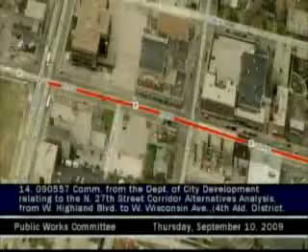Good morning, Commissioner. Good morning, Mr. Chair. We'd like to share with the committee this morning the results of an analysis done by the department in conjunction with Avenues West, some of the West Side businesses, as well as the Sohi District, and of course with the full concurrence of Alderman Bauman—in fact, at his request. We're very pleased to have representatives this morning from PDI Graef, who conducted the analysis.

They're going to go through the findings. One of the reasons we did this is because there's an opportunity to take state funding allocated for North 27th Street repaving, as well as streetscaping money made available through another grant process, along with the ongoing commitment from folks we've been working with in the Business Improvement District, the Sohi District, and the neighborhood, to really make a substantial change on North 27th Street.

Alderman Bauman challenged us to not just look at it as a repaving project, but to look at it with a blue sky approach—what could we do if we really put our minds to it, how could we provide some type of transformative reconstruction of the street. With that as our guide, we instructed our consulting team to do exactly that. I think it's a very exciting concept, and I think you'll all admit it has real appeal.

If this were to be implemented, it would result in the city having to acquire some property. I want to be very clear, particularly to the property owners, this is not a property acquisition strategy that we're putting forward this morning. This is simply a communications file, blue sky thinking, what could be done. It does not commit the city to a position to acquire any property at all, but rather to start a process with the street—which has been ongoing—to figure out whether or not this makes sense to move forward.

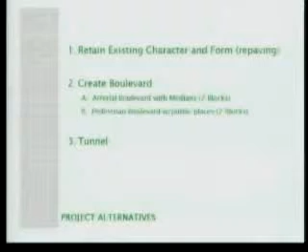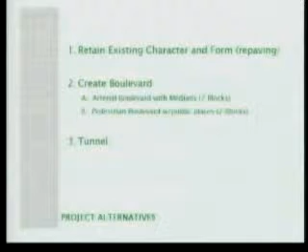It's very limited. This slide lists three specific options we were asked to analyze, looking at the potential cost—very ballpark—and the land use impacts of these three directions, investigating each alternative. In some cases we used existing material; in some cases we drew up new ideas. The first alternative is leaving everything the way it is in terms of development and buildings, but retaining the existing character—essentially repave and add streetscape.

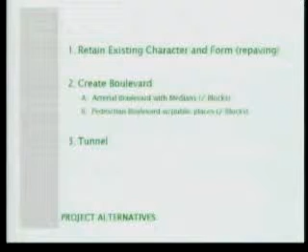The second alternative, listed on screen as 2A, is to create an arterial boulevard with a median. The third alternative we were asked to look at was a tunnel. Now, I should back up one picture—this is the project area, and we actually extended the project area a little bit beyond what our contract defined.

The project area went from Highland down to Wisconsin. We thought, after a lot of discussion with the community groups and staff, that it made sense to think about going a little bit further south down towards St. Paul, although that southern edge is a little vague as to exactly where the analysis should stop.

So we were to look at these three alternatives and estimate the land use impacts and the cost estimates for each of these three. Alternative 2B is something that came up during the course of the process, and we were not asked to provide a cost estimate for that. This is, again, a very tight budget.

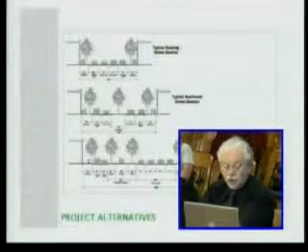I'm going to describe each of these three alternatives. Basically, there's the existing street section, a typical boulevard, and what we just named for convenience in the context of this document, a grand boulevard street section. I'll talk about all three of those.

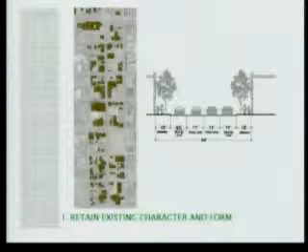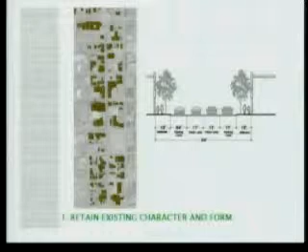Comments about the existing street are that the sidewalk widths are a little bit tight for any kind of outdoor sidewalk cafes or general pedestrian movement. Secondly, on 27th Street, if this is going to take the amount of traffic that DOT wants it to take, the parking lanes would probably have to be driving lanes during rush hours. There may be some way to balance that between on-street parking in non-rush hour periods.

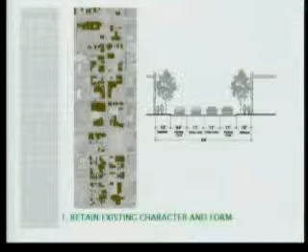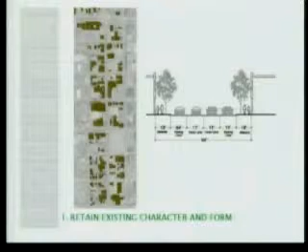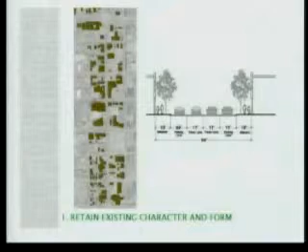And the cost estimate for this, which was basically given to us - the city has some good numbers on this - the repaving was around $2.1 million, of which $1.8 million was state and $300,000 was local. Then the streetscape, which I believe was also state funded, is another $1 million. So this is kind of the base alternative. We didn't do any original analysis for this - there was no need to redo it. We're looking for ballpark numbers.

The second option was essentially to create a median from Wisconsin up to Highland. We looked at a variety of sub-options, like the possibility of a roundabout where it crosses Juneau. Maybe that makes sense, maybe it doesn't.

But the big issue with this median is that it would then require an 84-foot width right-of-way, which would involve expanding the road and taking down buildings on one side or the other, or maybe some combination of both. Again, we were looking here at big picture issues.

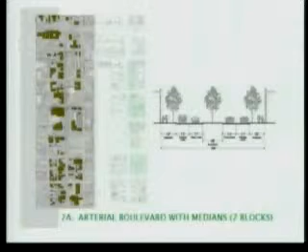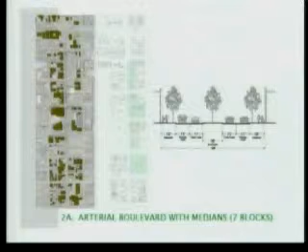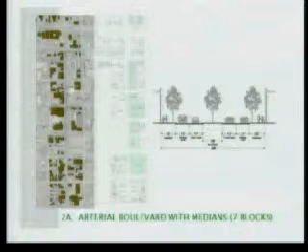We did a rough sum total of the assessed value - 125% of assessed value on each side of the street. On the west side, which I don't think we had before, Alderman Bauman, when we spoke, it was about $7.4 million of assessed value. On the east side, it's about $6.7 million, and that's just from Juneau to Wisconsin. I don't think we went down to St. Paul for that - check. We did go all the way down. Oh, okay, it includes down to St. Paul.

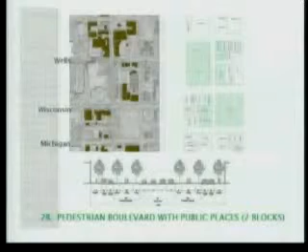The third option we looked at - and I want to say that in conversations with a lot of the property owners and other businesses in the community, there seems to be, I would say, a general leaning towards some version of this option as a preferred direction, notwithstanding all the items that Commissioner Marcoux mentioned. In this option, I'm going to back up a few slides here just to describe it.

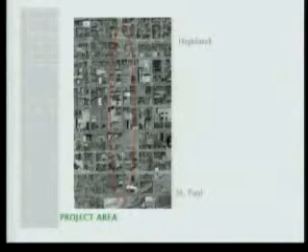In this option, essentially from Highland down to Wells, or I think it's from State down to Wells, the street stays the way it is, and the streetscape is used. But between Wells and going south, possibly to St. Paul, the street is redesigned into what we are referring to as some sort of a grand boulevard.

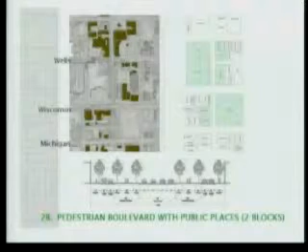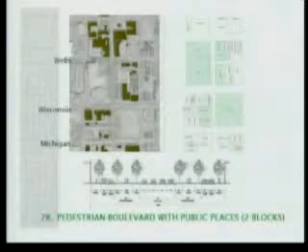By that, we mean the traffic runs down the center of the street, as you see right here in this cross-section. There are two side service aisles - they're not really frontage roads. I'm going to skip forward and then come back.

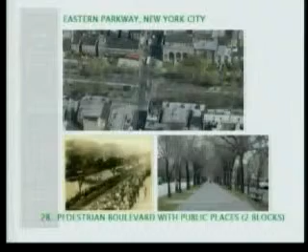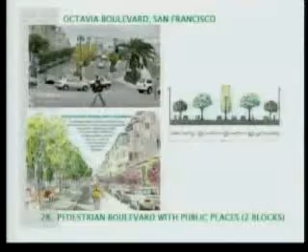These side aisles are modeled after historic boulevards. This is one in New York City that Olmsted did called Eastern Parkway, and this is one that was just recently done in San Francisco, and you can see the two side aisles here and here. And what those side drive lanes do - and actually the city of Milwaukee has some of these, except it doesn't have the landscape that makes them really attractive places.

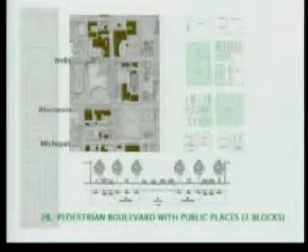The idea in this model is to essentially use these side lanes as a place for pedestrian movement and surface parking. However, the right-of-way is 164 feet when you do this. There are examples of this, and this is fairly typical. The reason for locating it on these two blocks between Michigan and Wells was that...